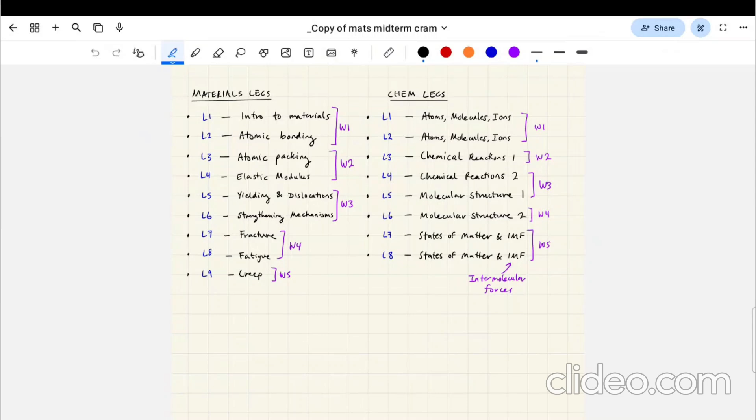So here are my notes. I basically made two large documents of notes. One is for the stuff you need to know for the midterm, for material science, and then the other one is for the finals. Let me show you that one.

Finals. Let's go to the top. Yeah, all that stuff over here on the left.

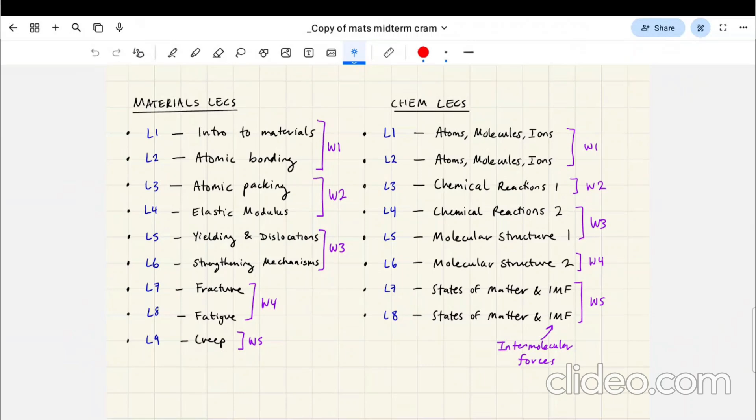Even though, to be honest, it's really annoying, this course. Like this is one of the most stupidly assessed courses, crazy contact hours, stupid assignments. Anyway, I digress. So let's get started. Oh my god.

If you see this, you're just gonna be really confused, and it's literally not even in English. Half of this, you're gonna learn the entire Greek alphabet basically, at the end of this course. But yeah, don't worry, we'll come back to that.

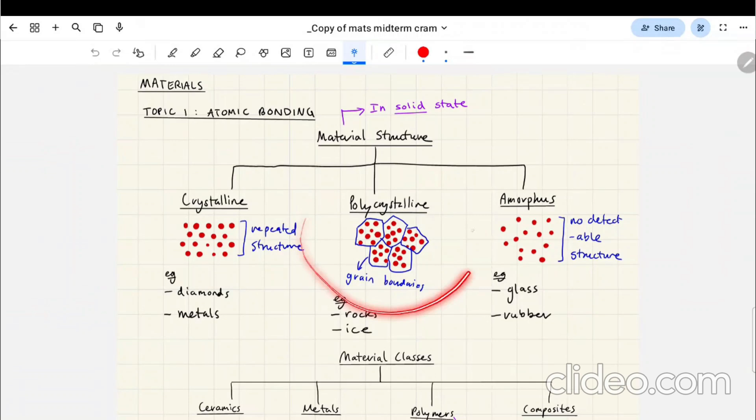Okay, so material structure, right? Atomic bonding, yeah this is all just context, I don't really care about the chemistry too much. So there's crystalline structures, polycrystalline, amorphous, all that stuff. And here's just some examples of some materials which fall under these material structure categories.

Basically with material science, we essentially only really care about solid state materials. Later we'll do a little bit of metallurgy, which is talking about how metals behave in liquid form and stuff like that. But most of the material science part of this course focuses on solid state structures, solid state substances, or whatever.

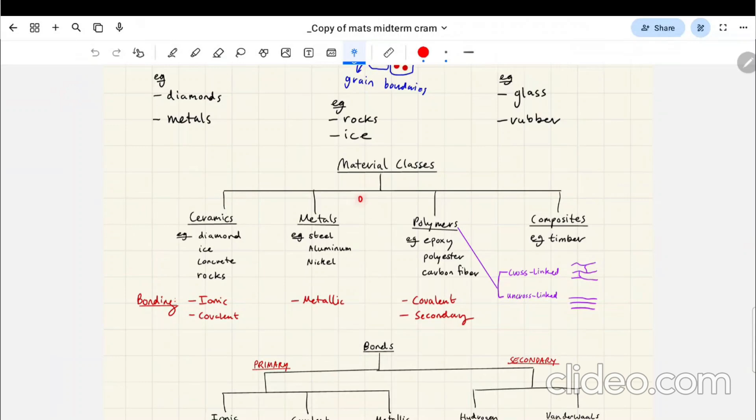And then there's 4 general material classes, right? So this is pretty important. Basically we have ceramics, metals, polymers, and composites, right? And I've just given some examples which really relate to civil engineering. So concrete, that's probably the most used building material in the world.

We also use masonry, like bricks and stuff like that, a lot. Steel is probably the second most used building material in the world. It's a lot more expensive, a lot denser, but it has really strong mechanical properties. It's also horrible for the environment to manufacture, but we love that kind of stuff as civil engineers.

I'm just kidding. And then timber is another pretty common building material. It's becoming more common with bigger buildings and stuff like that. I can yap on for ages about timber, it's what my thesis was about. But yeah, it's got really cool mechanical properties. We might touch on it a bit later.

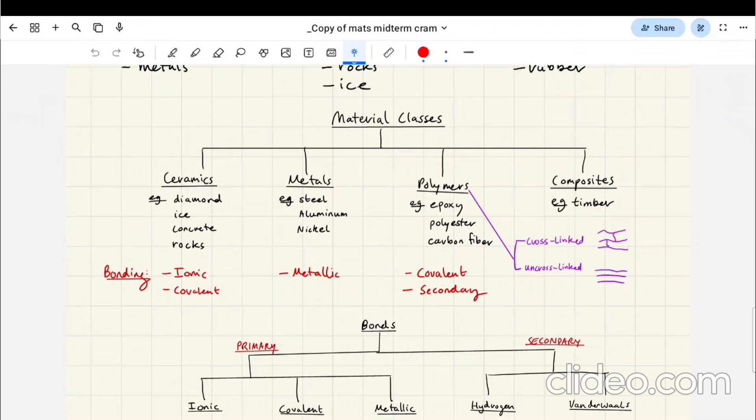And then, to be honest, composites are quite strange in terms of their material structure. Polymers are quite unique as well. We do use this a little bit in civil engineering, but it's more so used elsewhere. Actually, we use epoxy a lot, for binding together boards of timber and stuff like that. But we can also use carbon fiber, and stuff like glass fiber, to strengthen structures in civil engineering.

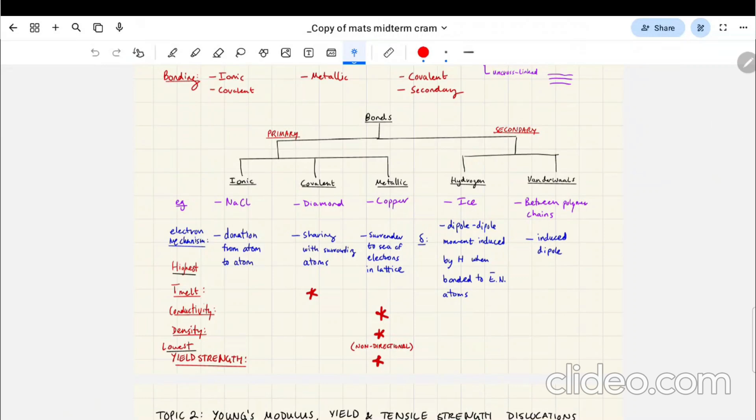Okay, so in terms of bonding, there's a few different types. You'll learn this in the chemistry part. There's ionic bonds, covalent bonds, metallic bonds, and they have these kinds of properties. Then there's secondary bonding, which is kind of like, they're not directly bonded, but you have these kinds of interactions.

Okay, let's go on to talk about Young's modulus and bond energy and things like that. So in terms of the actual atoms, if you have two atoms for your material, what is a bond? What constitutes a bond? Well, essentially, the atoms are attracted through electromagnetic, gravitational forces and all that stuff.

There's some sort of relationship mathematically between bond energy, force, and stiffness when you derive it with respect to the radius.

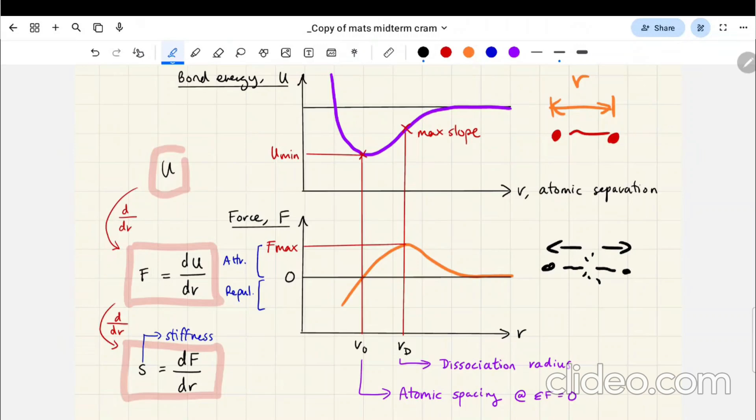Dissociation radius is kind of where the max slope is. Basically, at the minimum energy, we don't have attraction or repulsion, so these atoms want to stay this set distance away from each other. But the dissociation radius is this point of maximum slope, and it's where you'll have the max force wanting to pull it together as it's trying to break apart, as these atoms try to pull apart. To dissociate this bond requires some amount of force, F max basically.

Okay, now we're moving on to elastic modulus. This is less to do with that really small, atomic scale - we're moving on to macroscopic stuff, like the cross section of a beam, or any kind of rod or anything like that. This is pretty important.

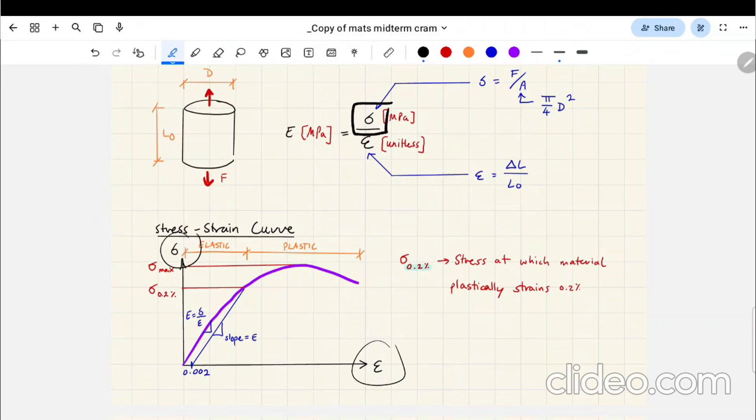So there exists a material curve, which you may or may not have seen - you might have definitely seen it if you did engineering studies in high school. It's basically where we graph stress and strain against each other. If you've never seen this before, sigma is usually given in MPa, and here's the formula for it.

So basically, sigma is stress, and stress is a way of normalizing forces. If you have a rope, and it's in tension, being pulled apart, it's basically asking: how much force do we need to break that rope? Well, you might be thinking, it depends how thick that rope is - the diameter and the cross-sectional area of that rope.

So we have to express how strong the rope is in terms of a stress - it has an allowable stress. Based on that stress and that cross-sectional area, we can figure out how much tension force will break that rope - we can backwork all these formulas. So I say here that the area is pi on 4 d squared. You might be more familiar with pi r squared - this is basically the area of a circle, but if we have a cross-sectional area which is rectangular, like this...

Yeah, this formula is different. Obviously, it's going to be whatever this side length is times by this side length, right?

Okay, and then in terms of strain - that was kind of to do with stress. Strain is a way of normalizing the displacement of this rope. So let's think for a second about when we pull this rope, how stretched it gets. That's what we call delta L, the change in length, or sometimes it's called the linear displacement. And we should normalize it based on this overall length.

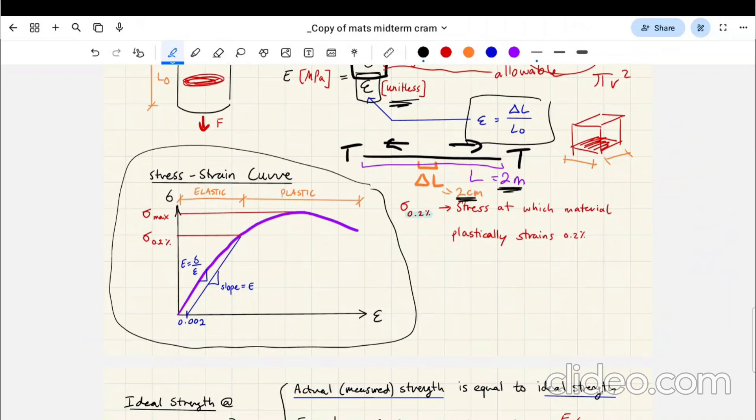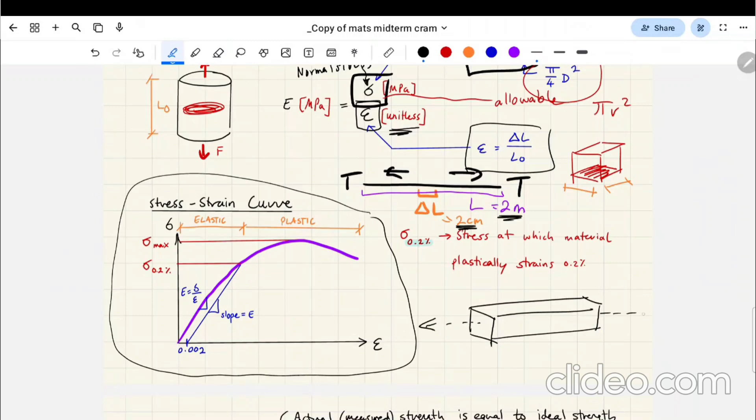So for simplicity, I've called this notation here sigma as stress, but this is what we actually call the axial stress, or sometimes the normal stress. So if you have something like a rope, let's just say some generic mechanical member, we have different directions to define. Along this axis, which goes through its middle longitudinally, that is what we call the axial direction. That's what all these formulas apply to, essentially.

We'll get - I think later they touch on shear stress, which just works in a different direction. They also might talk about - no, I think it's just shear stresses. But anyway, yeah, okay great. So this is the axial stress strain curve, essentially, that we've graphed.

So this is just an example. Am I overcooking my explanation? Okay, maybe I'll come back to the shape of this particular curve. But it kind of looks like a parabola almost - there's this area which is relatively linear, like here, and then you have this area which falls off a little bit. So keep that in mind, we'll come back to it.

Yeah, there's a bunch of random formulas, and if you remember the formula sheet I showed you earlier, you're gonna look at it and be like, why is there so many formulas? It's because we have a lot of empirical formulas, which are basically based on testing or approximations of what you'd expect for different materials. And because there are many different types of materials, that's why there's so many different combinations of random formulas they can give you.

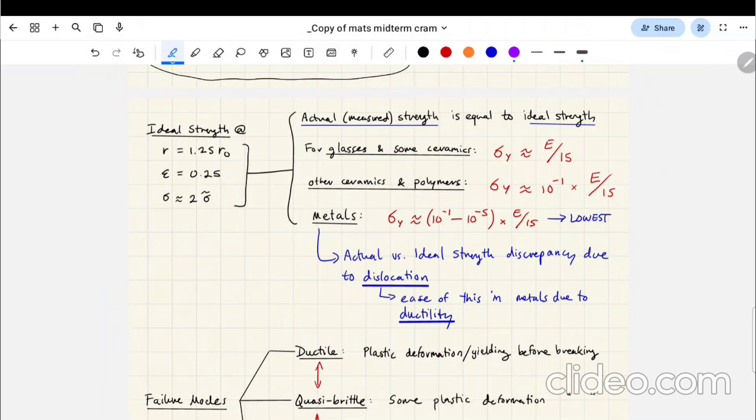So yeah, these are all approximate - these are all guesses for what the yield strength is essentially.

Okay, so let's talk about failure modes - we have ductile, quasi-brittle, and brittle. Basically, the material curve I just showed you earlier looked something like this - linear part and falls off, tapers off, a little bit like a parabola. Basically, this is what we constitute as a ductile material. Usually metals are ductile materials.

So that's stress strain. What it says is that for the area which is linear, if we go back and forth in this area - as in we stress it, say with the tension pulling force, and then we unload it, and we stretch it and unload it - it's gonna not have any permanent deformation. So that's what we call elastic, that's what we call the elastic range. And if you think about an elastic band or a rubber band, when you stretch it and unstretch it, it doesn't deform - that's why we call it an elastic band.

But this area past here is called the plastic region, and that's where you start to get permanent deformation. So if you imagine something like Play-Doh, if you stretch it enough, it's gonna start - here's a bit of Play-Doh, you start pulling it like this.

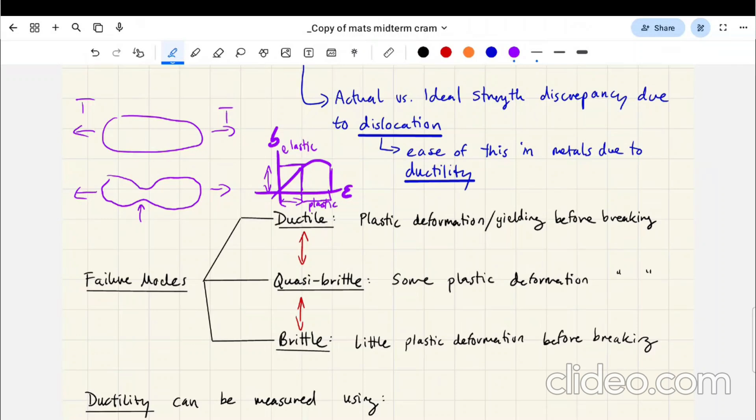It's going to start necking, which is where you have this permanent deformation. That's called the plastic region, before it eventually breaks. Metals kind of behave like this - steel beams and stuff have this kind of warning to tell you it's about to break, because you can see this ductile behavior, sometimes called yielding.

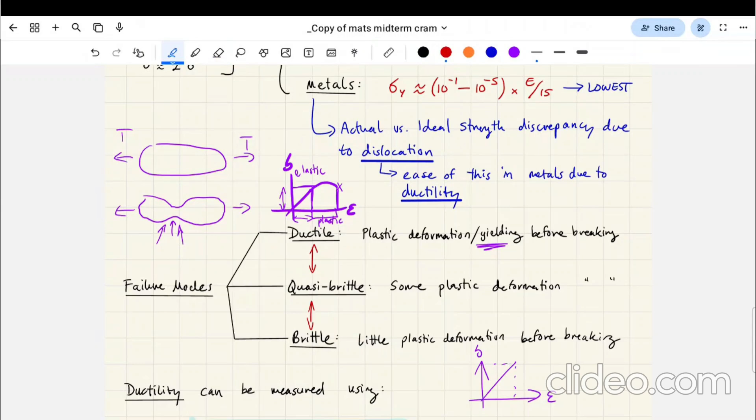Whereas brittle materials - rubber band's a good example - would have a stress strain curve that looks different. It basically doesn't warn you before it's going to snap when stretching, as in necking or anything like that. You stretch a rubber band enough, it stretches, and then it just snaps. It doesn't have any necking behavior, or very negligible amounts. There's a lot of materials that behave kind of like this.

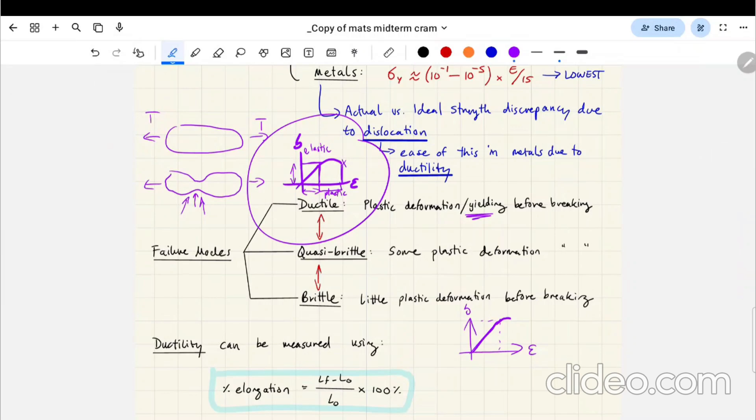Ductility is measured in many different ways. People have different measurements of ductility - it's more so a vibe-based thing than anything. People can agree that a material curve that looks like that is ductile, something like that might be quasi-ductile or quasi-brittle, and then this would be brittle. There's just different formulas that express a percentage to tell you whether something is or isn't ductile. It's basically how much does it neck or whatever before it breaks, and there's different thresholds depending on who you ask.

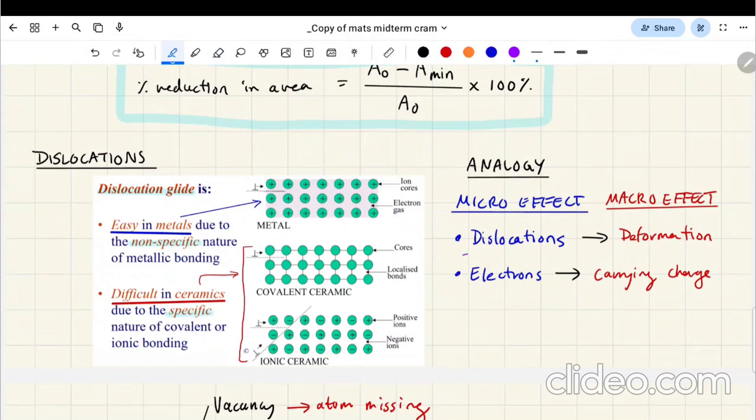Now we're moving on to dislocations. Essentially, dislocations are a part of metals - dislocations is what causes metals to have their ductile properties. Here's what a metallic lattice looks like, and it's basically where you have deformations on this microscopic scale, called dislocations. But for your ceramics, it's difficult for this to happen, so ceramics are generally more brittle because this effect doesn't happen on a microscopic scale. Your concrete and stuff like that, without any reinforcement, you're not going to get any dislocations - it's just going to have more of a fast fracture breaking kind of failure mode.

That's just a lot of word jargon, basically. Just trust me, bro.

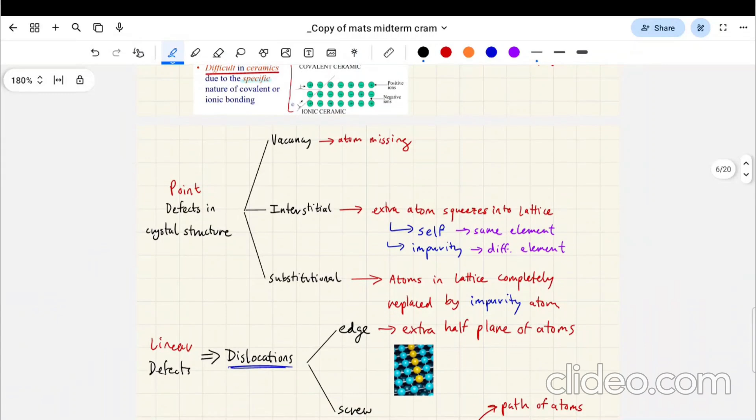There's something called defects, which is essentially in your large scale, like metallic lattice or whatever - for example, there could be a misplaced atom or ion. There are different cases for them, you can give it a read through yourself, but if it's a single point, a single atom, it's called a point defect. And if you have a line of them, it's called a linear defect - that's essentially what dislocations are, defects on a kind of linear scale.

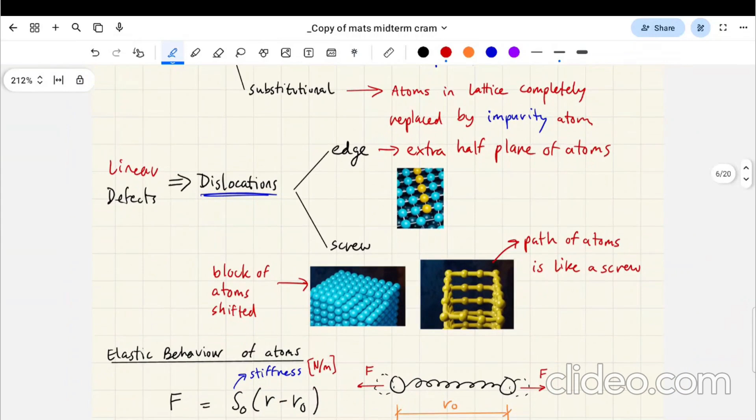There's some pictures of it here as well. There's a really good video by Efficient Engineer - you should definitely check out that channel. They cover a lot of material science concepts, and they have really good visualizations for it.

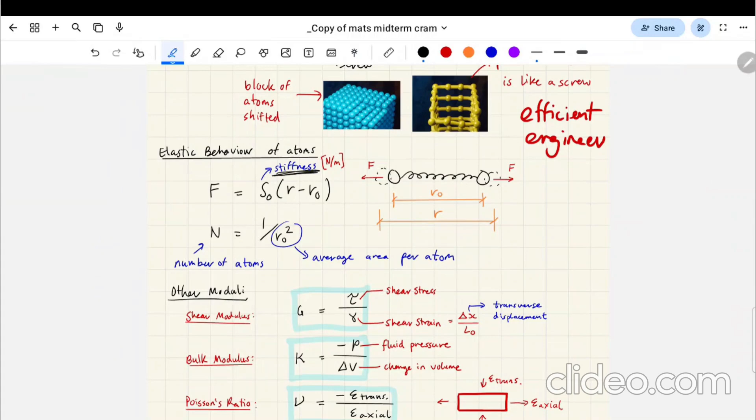But yeah, there's some more kind of mechanics of tiny atoms here. As I mentioned before, there's stiffness, which is the tendency for these atoms to want to pull apart. When I say other moduli, the one we've been talking about is E, the elastic or Young's modulus. There are shear stresses as well as axial stresses - this one's the axial stress and axial strain, or normal stress, normal strain.

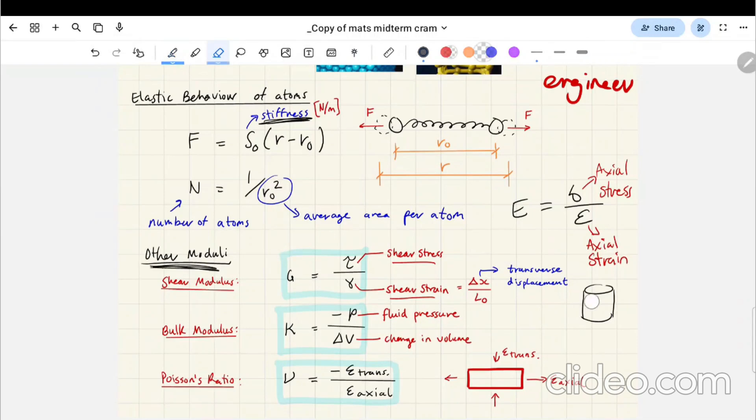So basically, your shear modulus considers forces in a different kind of direction. For example, let's get an example - let's say you drop a cylinder. Oh, no, that's not a good example. Do I have a good example?

Okay, there's not really an easy example I can think of off the top of my head to explain this, but just trust me for now. I think I have a picture of it later, maybe.

So bulk modulus applies to fluids. I know I said the majority of this course focuses on solids in terms of the material science half. Bulk modulus actually does apply to solids as well, but to a very negligible scale. More so, it makes a huge difference for water and other fluids as well as gases. It's to do with pressure, right?

It's essentially what causes, if you imagine a submarine or whatever, there's a high amount of pressure underwater, and it causes that submarine to have compressive forces acting on it due to the water surrounding it. So that's all to do with the bulk modulus.

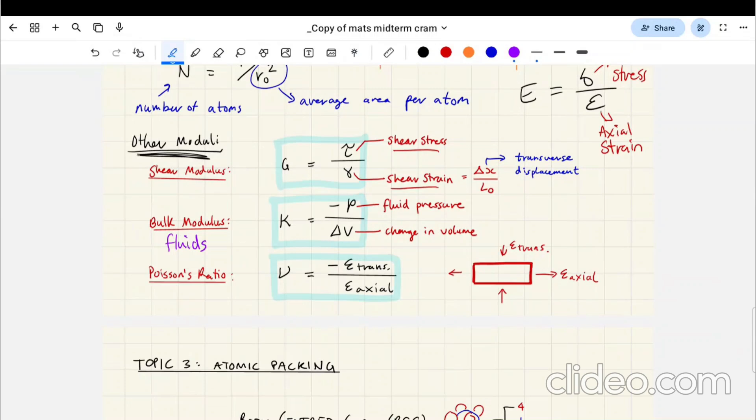The Poisson's ratio is essentially the squash ratio. So if you imagine a slimy cube thing, a little bit of jelly, if I push down on it against the ground, you can imagine it wants to stretch out in those directions. It's going to be quite pronounced on a slime or jelly cube. But every solid material is going to have this squash and stretch kind of ratio to it, just to a lesser scale.

This generally applies to soils. So if you're doing civil engineering, when you do soil mechanics, it'll definitely apply to that.

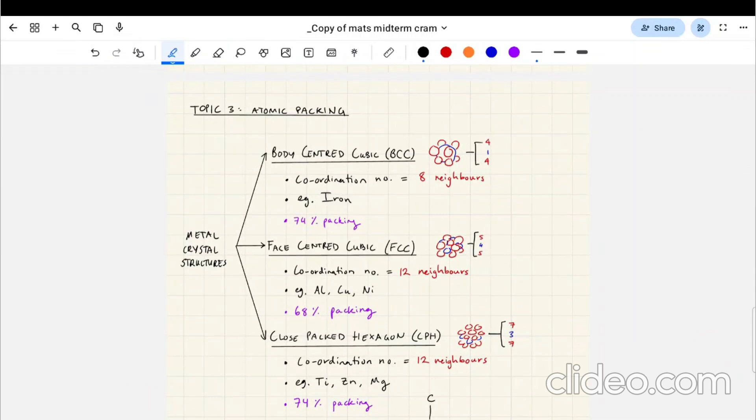So atomic packing, there's body-centered cubic, face-centered cubic, and close-packed hexagonal. Yeah, whatever, who cares, you know what I mean? You can just look through my notes.

Okay, so strengthening, this is more to do with mechanical properties now. Essentially every material is going to have an intrinsic strength, but you can strengthen it based on your understanding of its atomic structure.

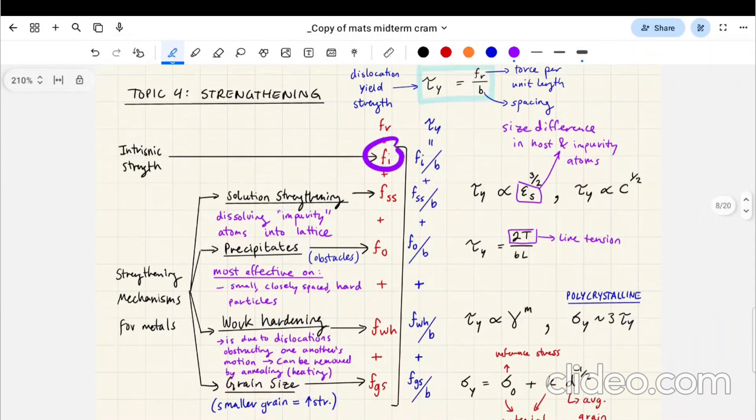So for example, with metals, we talk about steel a lot, but what you might not know is that steel is actually an alloy of iron and carbon. So alloying, aka mixing a metal with a different type of substance, can actually improve its mechanical strength. That's just dissolving an impurity like carbon into its lattice.

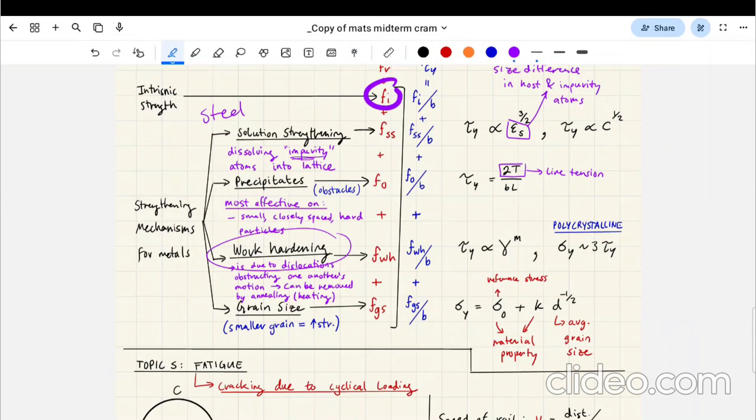So another thing is work hardening. What's a good way to explain it? I guess it's basically when you stretch a piece of metal, for example a piece of steel, and we talked about that ductile kind of nature of it, where it does that.

This tapering effect is actually work hardening. It's due to dislocations forming in the metal. So this would be like a zoomed in piece of metal. You see these dislocations forming, and they actually start obstructing each other from moving, and it ends up making the material stronger.

So what you can do is pre-stress a metal, like steel for example. You can load it past the elastic point, up until a certain point, and then you unload it. So we slowly increased its stress up until this point, reached here, and we can unload it like this. And when it returns, it follows the linear curve.

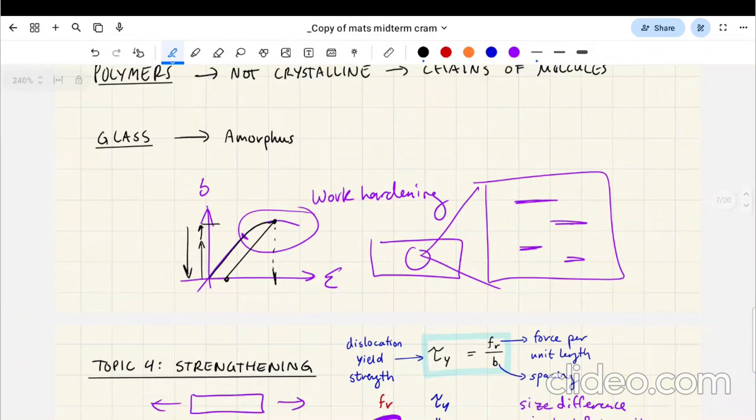Anyway, it essentially is going to be stronger if you pre-stress it like that. It's going to be less tough because it'll follow this material curve, but it'll be stronger.

Okay, let's see. Grain size, yeah, let's talk about that. So, should we talk about that?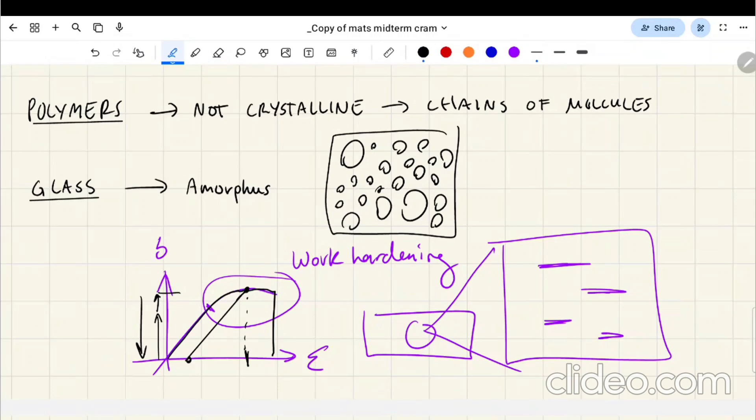I guess an example of this would be concrete, right? It's going to be made out of different size particles, different rocks and stuff like that. And if you have smaller grains, it's going to fill up more of these voids, and it's just going to have stronger mechanical properties and stuff like that.

Okay, so now we reached fatigue. Fatigue is quite an interesting concept. Cyclical loading just means loading and unloading. An example of this would be like a car, imagine a car tire.

The parts of the rubber of the tire keep spinning around. It gets compressed when, say, this part of the tire reaches the bottom or the ground, and it gets squashed, and then it gets unloaded a little bit here where it's not touching the ground anymore. Stuff like that, right? So fatigue is quite common

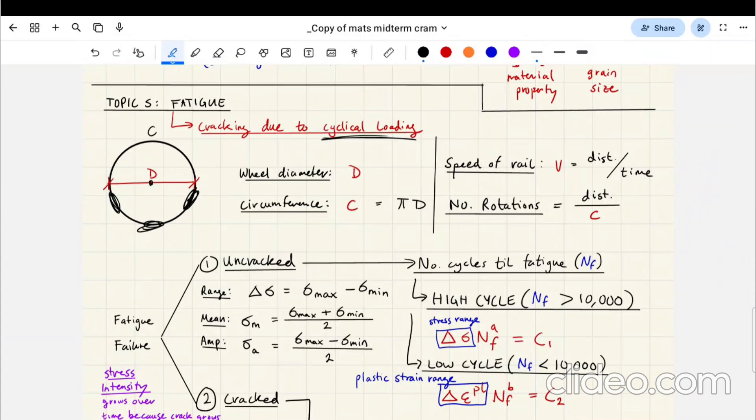in mechanical engineering, I want to say, when you're dealing with machines and stuff like that. But in civil engineering, you can imagine it could be to do with structures, right? Structures will experience loading and unloading of different amounts because sometimes people will be inside a building, sometimes people will come out of the building. That's an example of cyclical loading, right? So there's all these formulas to do with it.

So you can have basically two main failure criterion for fatigue. It can fail by having a high number of cycles. Let's imagine this wheel thing again, right? A high number of cycles, but lowish stress. Or it can have a high amount of stress, but it's loaded less. So these are the two main ways it can break.

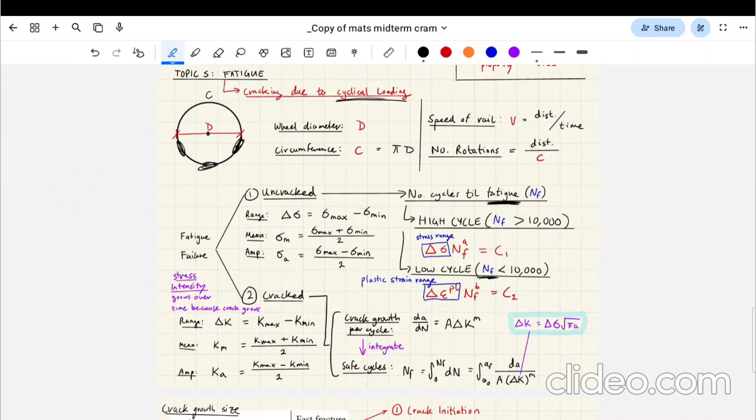Crack growth per cycle. Basically cracks will start to form as you keep loading something and unloading it. So you imagine a concrete structure, the cracks will keep growing and growing in size. There's basically formulas and stuff to do with it. Once something becomes cracked, you can't use stress anymore directly to express these formulas. You have to use something called the stress intensity, because stress intensity is proportional to the size of the crack.

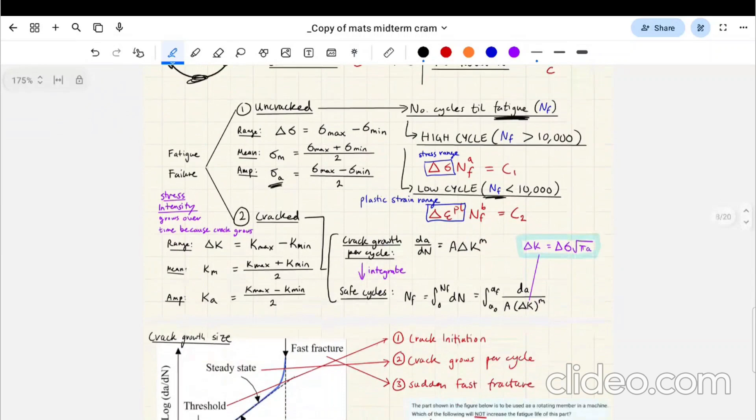Yeah, it basically just does your head in. You have to wrap your head around all these formulas, but they kind of make sense, I guess. Here's like crack propagation, there's all these formulas to do with it. There's all these questions I've included as well to do with it.

So ferrous materials is to do with iron. Iron is Fe, the chemistry notation. So ferrous materials is materials based on iron, essentially, like steel.

Yeah, so there's some questions in your little quizzes or whatever. Definitely in the midterm there'll be as well to do with fatigue. Next thing's fracture. So fracture can actually apply to ceramics as well as metals and stuff.

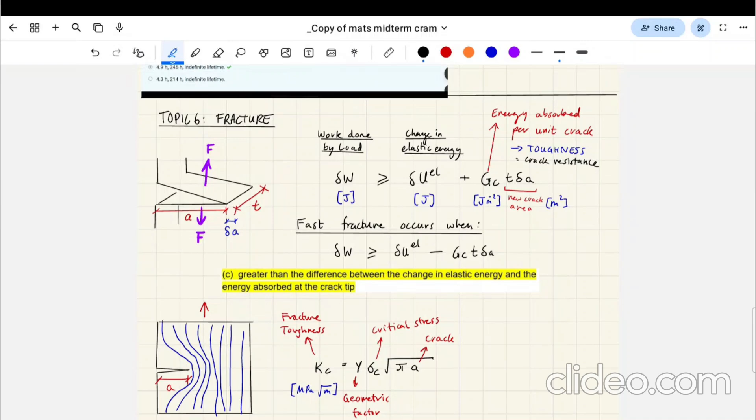So essentially the theory behind fractures is you have like a perfectly ideal material of some amount of area or volume, and then if a crack forms in it for whatever reason, essentially it's going to grow due to further loading.

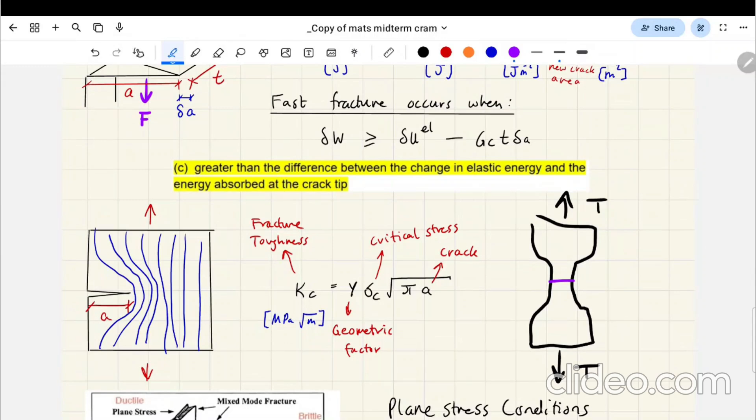So I'll give you an example. This is what we call a tensile test piece, where you pull this on either side. I think this is one of your labs. You do a test on this specimen, which I think is made out of Perspex or something. You do your tests and it doesn't have any cracks in it, and then you record the results and stuff like that. But then you do another test where you have various sizes for cracks, and then you try to match that up with the theory and the formulas that they present here.

And it's essentially saying here's what the stress flow will look like. Basically all the forces when you have cracks, or all the stresses, will have to concentrate and flow through these areas around the cracks. And it's actually one of the reasons why these test pieces are shaped the way they are. I didn't do a very good job drawing them, but they actually look kind of like this.

Because they want all the stresses to evenly flow through this area, they're also a bit more narrow in the middle here because you essentially want to encourage it to break here and not here. If you have a uniform force, like a tensile force pulling through it, it's very likely that it'll break here instead, because it has a smaller cross-sectional area there, which will have higher stress than over here, even though the same force is flowing through it.

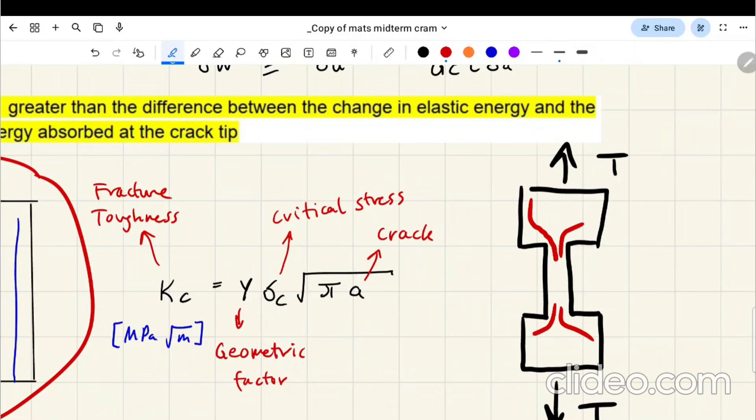Back to what I was saying, if the tensile test piece was like this instead, you're going to have these kind of points of weakness around the corners, which will experience an unusually high amount of stress at those points. So it might snap off like here instead of the middle, right? Yeah.

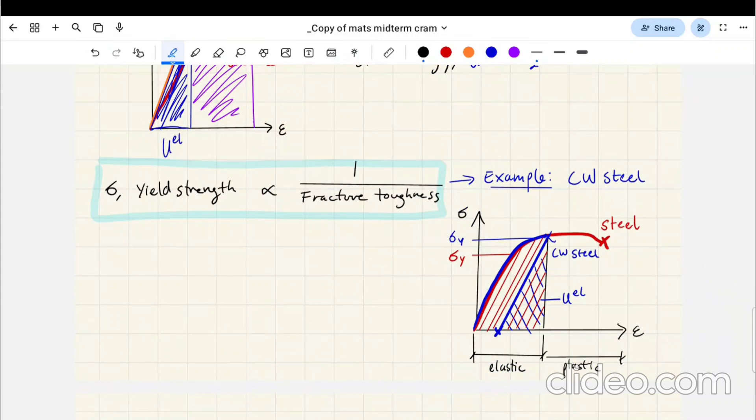Another thing I should mention is that the yield stress is basically the point at which it stops being linear. For a brittle material, it doesn't yield essentially, it just has one important point we have to think about, and that's its ultimate strength, aka the point at which it breaks. But for a ductile material like steel, its yielding point might be here instead, and that's the area that's linear, and then it will also have an ultimate stress, which is a bit higher, and that's essentially the highest it can go for steel.

This diagram explains what I meant earlier about work hardening. If you cold work steel, the CW steel there, you basically stress it to this point here and then unload it, which makes it less tough. So it reduces its strain energy, but it actually has a higher yield strength. That's what I was trying to say. The yield strength improves, so it doesn't yield at that same point anymore, but it will be less tough. So it basically becomes a bit more of a brittle material, which can be good or bad depending on its application.

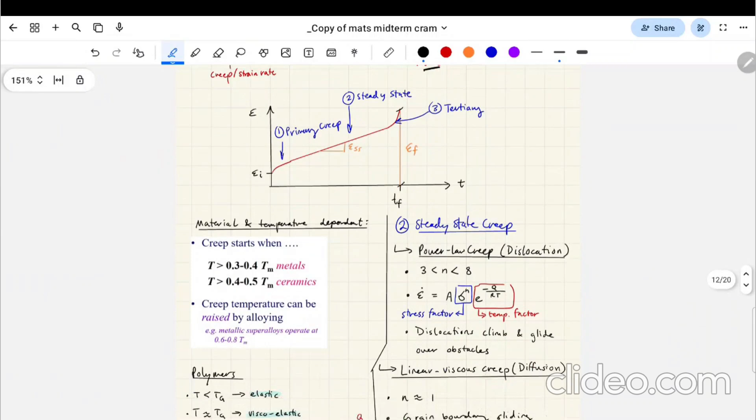So we also have creep mechanics. Creep is basically strain rate. If you remember this symbol from before, this is strain, and strain rate is just strain over time. So strain over time can be a function of three things: stress, time obviously, but also temperature, which will affect how much something will strain over time. Strain rate particularly is really important for, say, you have a building and you load it with whatever, it might start to sag over time. If you have a beam or whatever, you can imagine how it deflects or deforms, it will start to sag more and more. So this is all to do with strain rate.

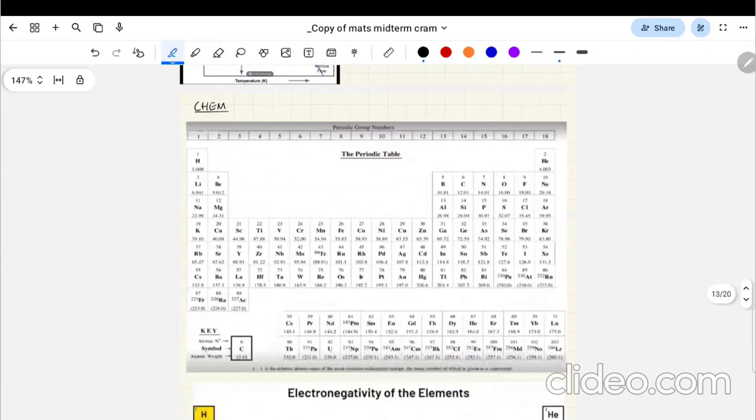So there's all these numbers that you have to memorize because these are empirical formulas again. And then whatever, who cares? All right, that goes to the chemistry part.

I have no idea how I'm doing for time, but I think I'm around 40 minutes. Let's do the finals stuff. So that's everything you need to know for the midterm. For the finals, let's go over this stuff a bit quicker because it's not as important until the finals, essentially.

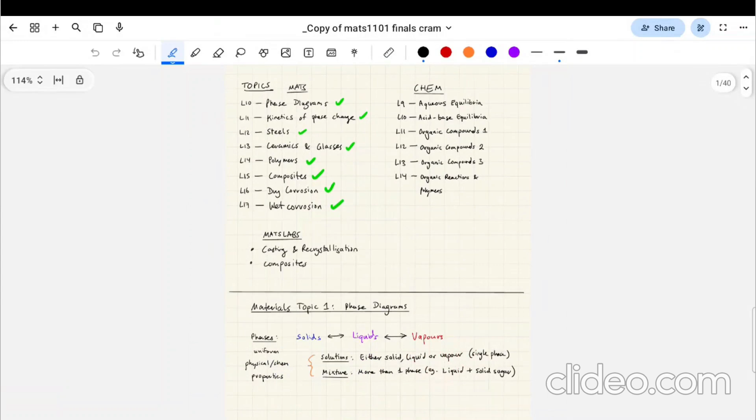Okay, phase diagrams. Phases are essentially what I've been alluding to. You have solids, liquids, and vapors, and vapors can be like gases and stuff like that. When you have something called a solution, it's where you have, let's say, a metal, and it's only in solid form, only in liquid form, or only in vapor form. But you can also have a mixture, and mixtures are defined as having more than one phase, so it can be partially solid, partially liquid as well.

So there's a graph to do with pressure and temperature. La-di-da, shut up, who cares?

Okay, so now we're kind of getting into metallurgy. Metallurgy is essentially the science of alloying metals or making them stronger. Essentially, it's the science behind making steel, as one of its more important features.

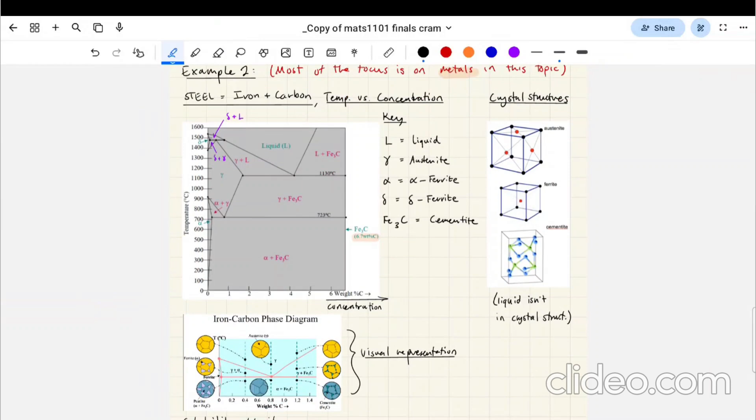We have something called a phase diagram, and then we have the concentration of carbon. We're looking at steel right now, so this is iron and carbon. Here on the left is pure iron, and then we increase the amount of carbon. I think somewhere around here is what we call mild steel, maybe around here, and then we can have moderate steel, and then high carbon steel.

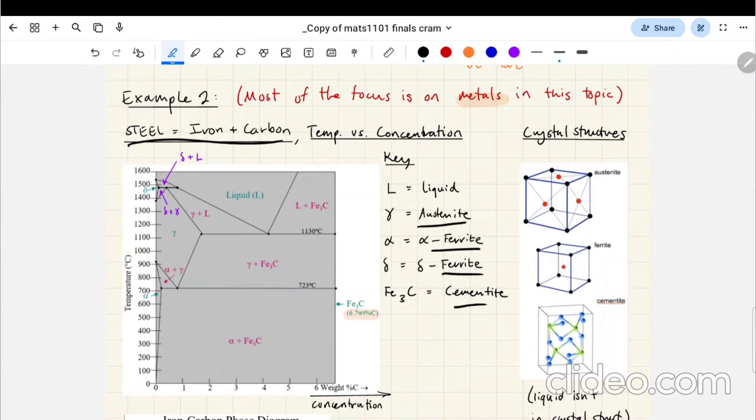Depending on what temperature we're at, or what temperature we cool it at, the iron will heat up and turn into a slightly different structure - it turns into things like austenite, ferrite, cementite. These have different crystal structures and different properties.

Yeah, there's all these equations. I don't like this subject very much, I'm sorry, I'm swearing more than usual. Okay, eutectic point. Oh, who cares?

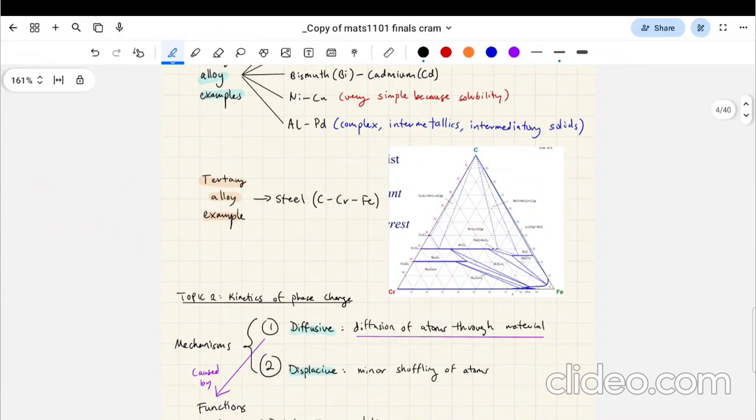Binary alloys are where you mix only two types of substances together, like iron and carbon. Tertiary alloys, as you can imagine, have three. I've just listed a couple.

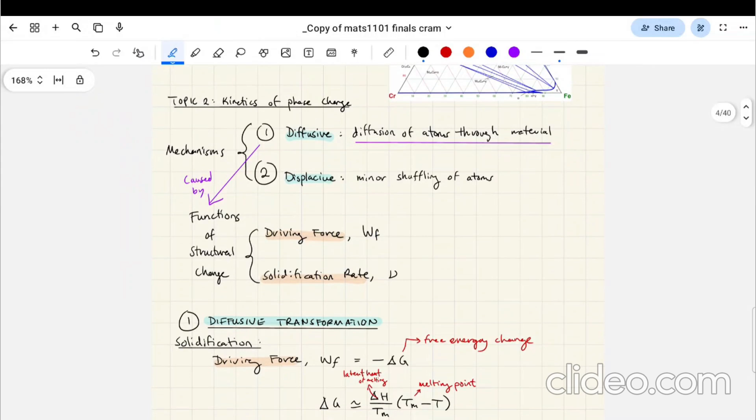This whole subject and material science part is just to do with having a shallow but broad understanding of a lot of these different concepts. You don't really get too deep into anything because it's just a first year course. It's trying to get you exposed to a bunch of different ideas which are useful later. But honestly, they go into too much detail for some of these topics, like all the formulas - I don't remember some of this stuff, to be honest.

Kinetics of phase change - as you can imagine, we have phases, like liquid, solids, gases. Phase changes is where you change between these states, and the kinetics is to do with the energy related to this.

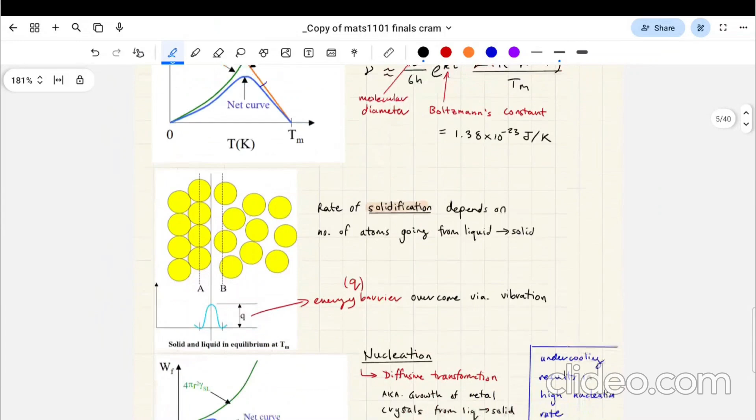Oh man, these formulas. I wonder what I can talk about. I don't know, this is all quite stupid. Okay, you know what, that's fine.

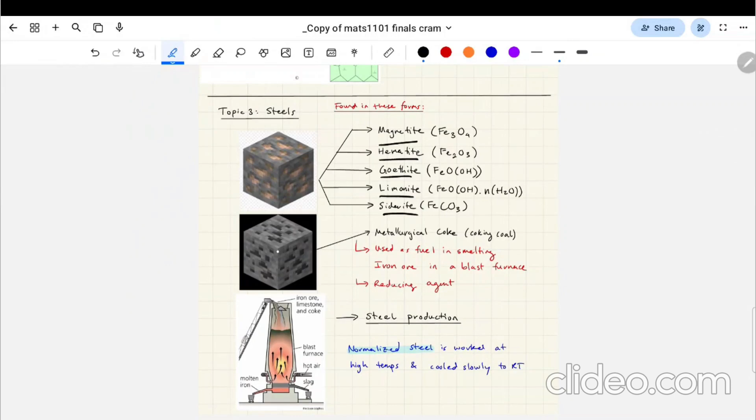So then they start talking about steels in general, and it goes from talking about it from literally where it's mined, the different minerals that you find in steel, all the way into metallurgy and steel production.

I'll give some examples - Martensite, tempering steel, which are used for making swords I think. Pearlite, okay cool.

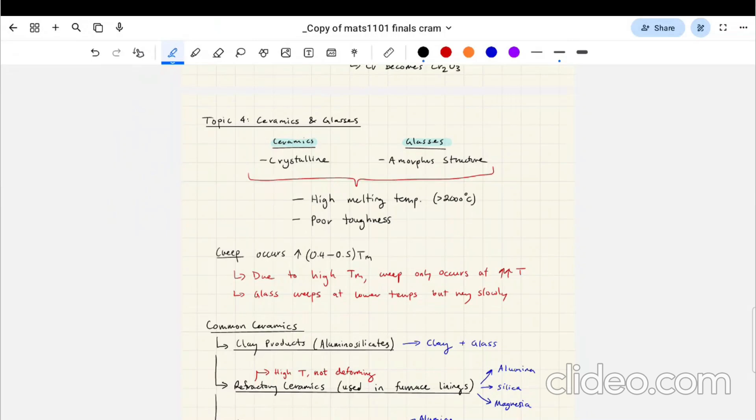So basically, they eventually in this course get really detailed into those different types of material classes. The one you just saw was metals, which they deal with quite in depth. Then they get into ceramics and glasses, and later you'll see they also do polymers, and then composites.

An example of ceramics would be like concrete. Glass is actually slightly different - it has an amorphous structure, which means it's kind of random like that, whereas crystal structures are way more organized.

Yeah, literally talking about clay. Like what?

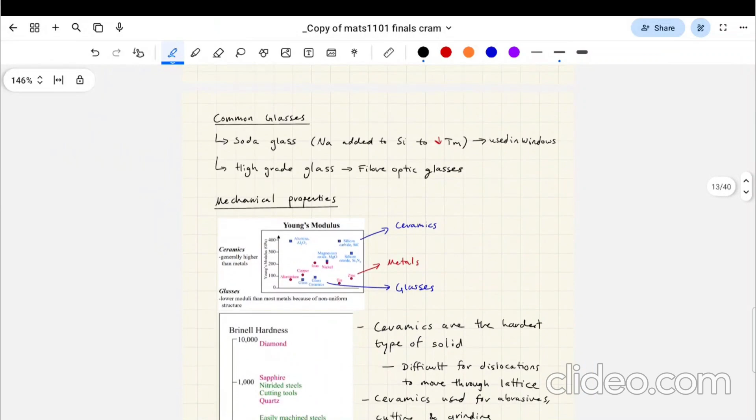Mechanical properties - essentially glass has the lowest Young's modulus. It has lower Young's modulus in general than metals, whereas other ceramics are generally higher.

If we compare all these things on a stress strain curve, glass would be something like that, and it's brittle. Metals would be something like this, but it's ductile - which I don't even know if it's that strong, like that. And ceramics are generally like this or something, I don't know. We're talking about Young's modulus, like the slope, comparing all those things.

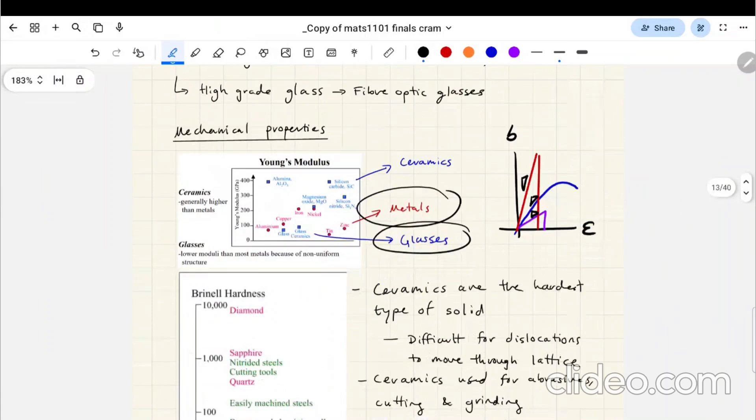Drew a Minecraft pickaxe there. Yeah, hardness - basically hardness is measured in terms of what can scratch something else. So generally we talk about diamonds being able to scratch everything underneath it.

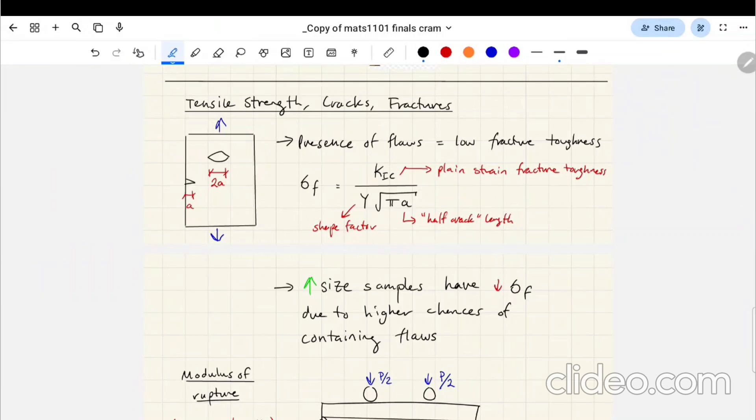Yeah, basically the hierarchy for hardness. This kind of goes back to fracture, crack propagation, things like that. It's actually quite important for ceramics, right?

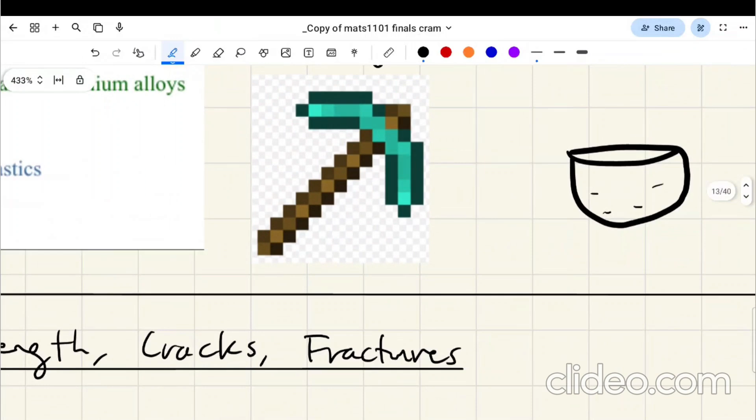Because if you imagine, for example, you have your ceramic bowl at home and you drop it—say you have 100 identical ceramic bowls, like IKEA bowls. You drop them from the same height. Some might break and some might not. The reason is that in the microstructure of the bowl, you might have cracks, and some of those cracks can propagate and completely fracture the thing, while others have less or differently located cracks. So ceramics and their strength is actually inherently random.

These cracks are also called flaws or whatever. They're inherently random, and this is part of the concrete course in third year, which talks about the strength of concrete, again a ceramic material. Let's call its strength F, and put strength on this axis, and this is the probability of it being that strong. It's generally normally distributed like this, and this is the mean strength. It's actually random because of the locations of cracks and how many you have.

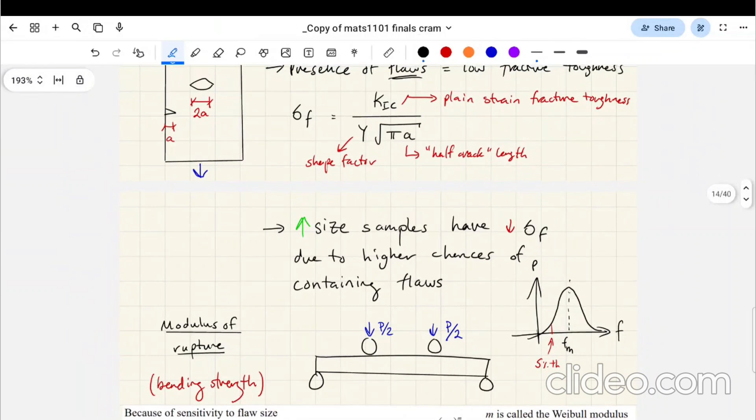When you're designing concrete in civil engineering, you're designing for the 5th percentile value. You're essentially saying, okay, the nearly worst case scenario is what we're going to design for. We're assuming concrete's strength is a little bit unreliable, and designing as if it's a little weaker than it actually is. So it's all to do with sample sizes, random distributions, stuff like that.

But modulus of rupture is to do with bending strength—it's that strength thing I talked about, but it's all to do with its strength in flexure.

There's something called the Weibull modulus, which is a little hard to wrap your head around because it's all to do with probability. It's actually a probability-based theory of materials, saying that certain ceramics can be modeled using this kind of bell curve shape, and the survival probability is given like this. Also, the probability of survival is 1 minus the probability of failure. So make sure in your finals you check whether they're talking about the probability of surviving or the probability of failing.

Going back to that example of the bowls dropping, there's a chance some of those bowls survive, and a chance some fail. Because of the axioms of probability, they're related to each other by a difference of 100%. So the Weibull modulus M is what they give everything in terms of.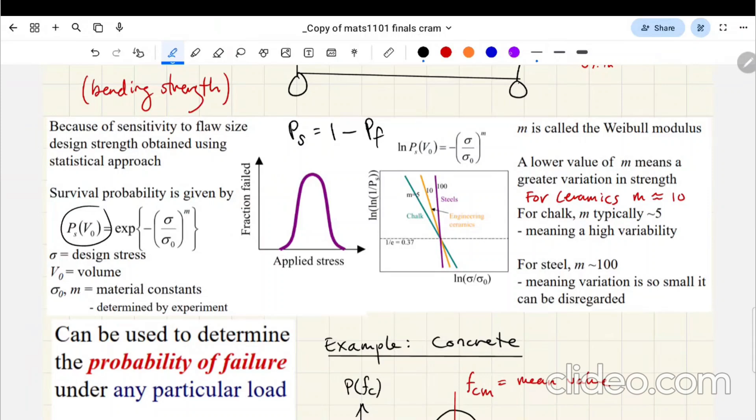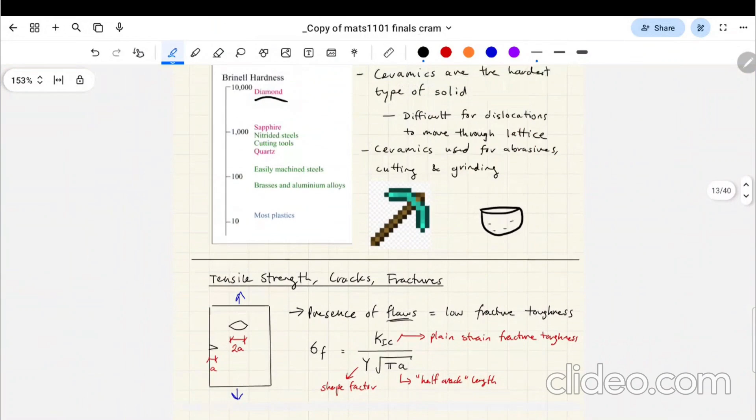A lower value of M means it varies more. So here they give an example: chalk has a higher variance in its strength. Engineering ceramics like concrete might be something like that. Steel will be even higher—steel is quite a reliable material. So even though we're talking about this in the context of ceramics, it does apply to other materials like steel, but it's less relevant for steel, I guess. It's still relevant, but it applies more in the context of concrete and other ceramics.

This isn't actually really part of this course, it's from concrete, but you can have a look at it if you're interested—it's to do with the normal distribution of concrete.

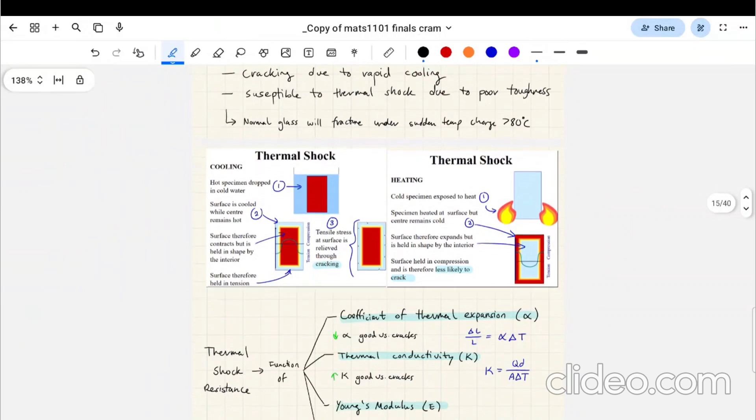Thermal shock—it's to do with how they temper glass on your phone screen to make it more ductile. So you can make glass more ductile on a smartphone, or the protector case is also tempered glass. It just makes it better against cracking and more ductile.

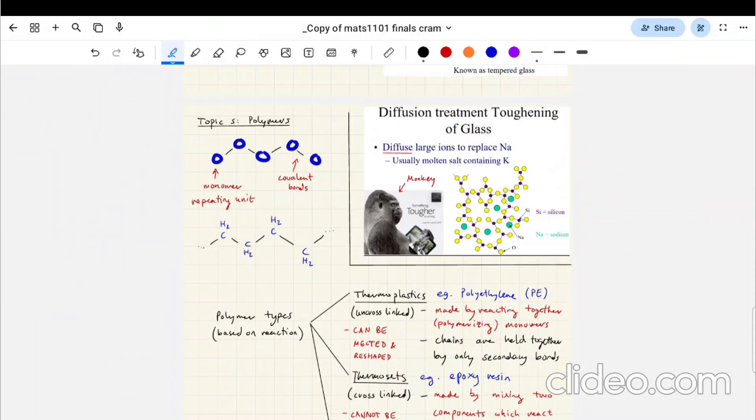Okay, polymers. Polymers are like plastics, I guess you can think of that as the main one, but glues and stuff are also made of polymers. Essentially there's two broad classes of polymers: thermoplastics and thermosets. Generally thermoplastics, like polyethylene, are a bit weaker—they can be melted and reshaped if heated to a certain temperature. But thermosets are essentially permanent, so epoxy, polyurethane, these kinds of things.

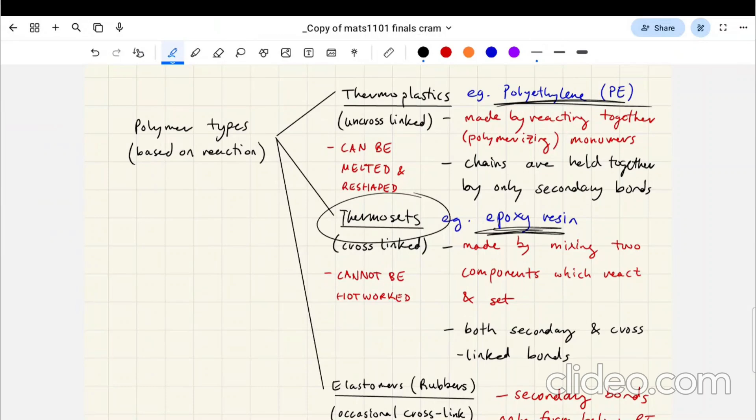When you reheat it the second time, it's not going to cause it to be melted and reshaped, right? So it's like a permanent kind of plastic bond. It's all to do with cross-linking in polymer chains. In the first week you learned that polymers are long chains, and if you have multiple long chains, sometimes you can have cross-linking between them. Those are actual bonds, not just secondary van der Waals bonds. So the more cross-linking you have, essentially the stronger your plastic material will be.

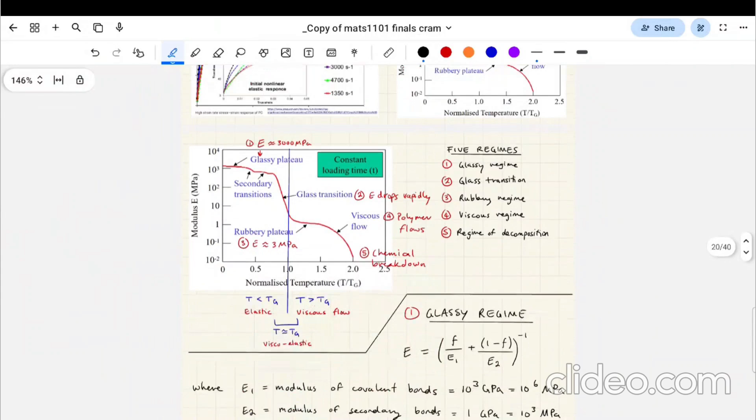There's all these examples. This is just detail, not super necessary. Temperature variation is kind of interesting though. You know how I said heating and remolding plastics - temperature is a big part of these polymers. There's the glassy regime and different stages to heating, that kind of thing.

Okay, composites. As I mentioned, timber is a composite material. Timber's quite cool, but probably the poster child of this topic is fiber reinforced polymers. You can have different types - glass fiber, carbon fiber, these kinds of things. These are all structural materials, or at least they can be used as structural materials.

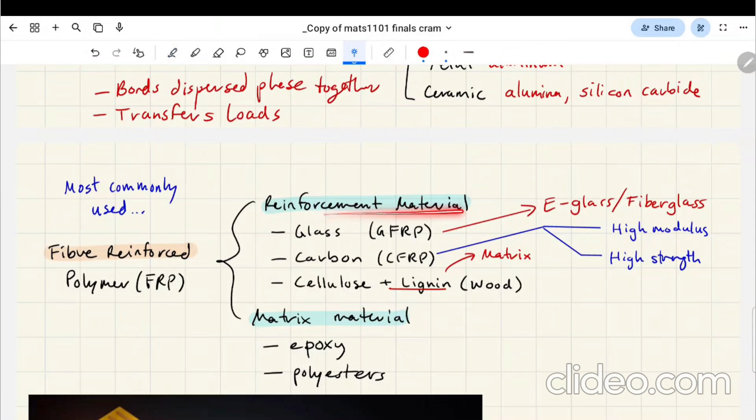Essentially, when you have composite materials, you're taking different types from other material classes. You can use one as the reinforcement material - so as a reinforcement you can use glass fiber or carbon. Then you have a matrix material, like epoxy or polyester, and they might look like this - you can see the fibers running longitudinally in this fiber reinforced polymer. The matrix material is the glue; it holds everything together.

Kevlar is an example - I think it's also called aramid. Kevlar is actually the aramid, and Kevlar is a brand name, but it's what bulletproof vests and stuff are made out of. It has a high impact resistance and stuff like that.

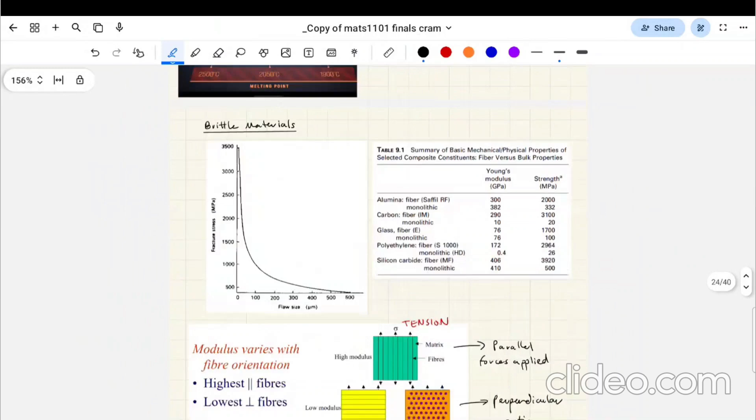So there's really interesting properties when you combine different materials and make composites - heaps of interesting mechanical properties.

Fiber direction matters. You can imagine if you pull these fibers apart in the cross-sectional direction, they'll split much more easily than if you pull it longitudinally. So if you have your timber, we talk about grain direction in wood - because wood is a composite material, if we pull it along the grain it's going to be much stronger, or rather push it together, it'll be much stronger than if you push it together perpendicularly, because that will cause the grains of wood to split.

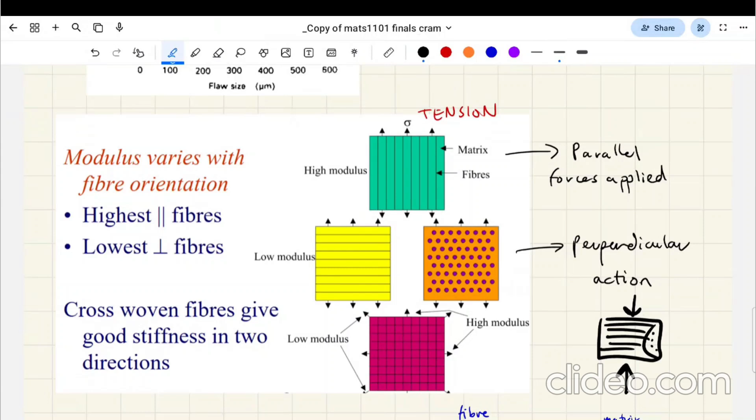So you can think of composites like a bundle of straws - the straws are like the fibers. Whatever kind of forces you apply to this bundle of straws in whatever direction is essentially how you'd expect it to react.

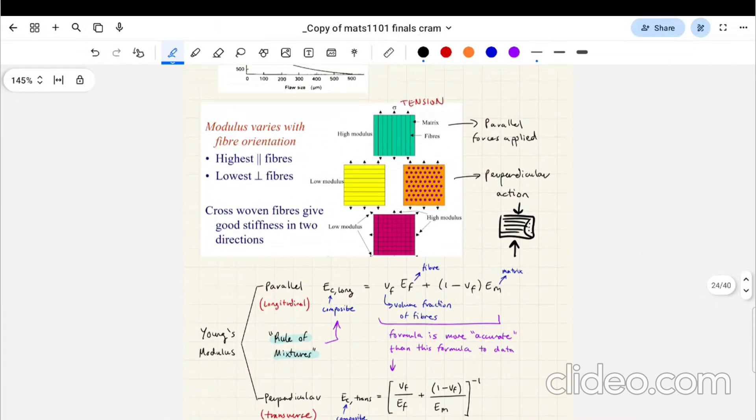Young's modulus will also have different properties depending on the direction, not only the strength. So yeah, it's really interesting.

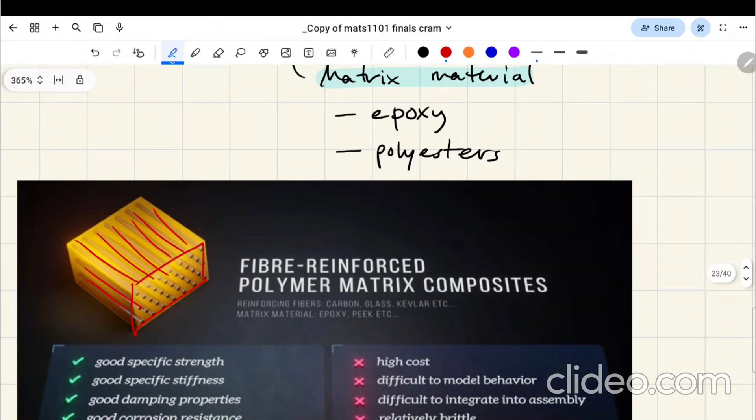VF is the volume of fibers compared to the matrix material. Going back to this picture, if I had even more of these longitudinal fibers per square area compared to the matrix material, then the portion of fibers increases and the portion of matrix material decreases.

Okay, that's pretty much it, I think. Is there another topic? Rule of mixtures - yeah, this is all to do with composites.

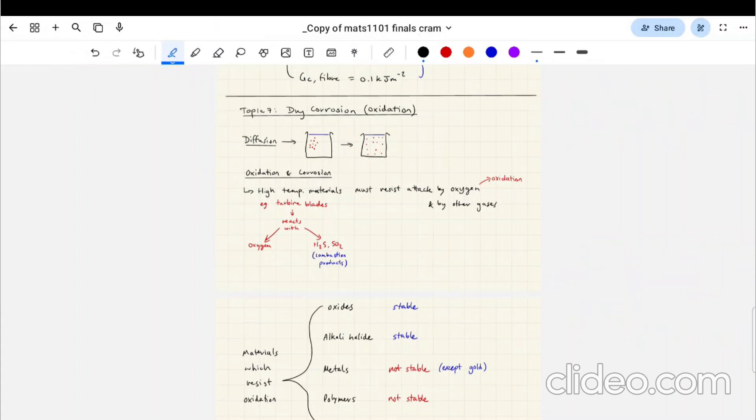Oh, corrosion - I shouldn't even talk about corrosion, there's a lot of chemistry related to it. Basically for things like steel, steel can rust. Dry corrosion is rusting without water, so it's just exposure to air. Wet corrosion is where there's also water, like moisture in the air, which causes it to rust faster. This is probably the most - anodes, cathodes - the most chemistry that's in the material science half, to be honest.

Oh my days, hated this topic. Oh wait, I'm getting into chemistry now. Okay, that concludes it.